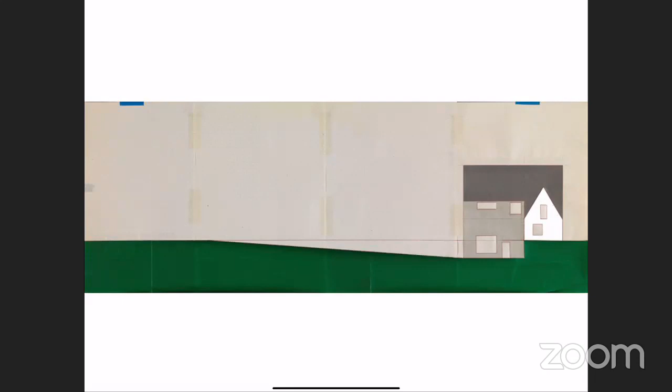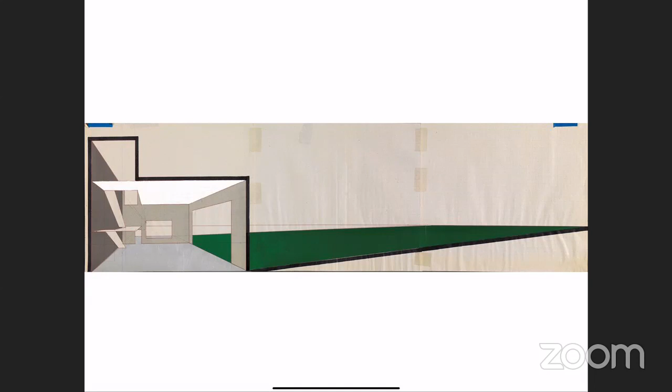When we were there, we felt that it was not too small as such, but maybe the space felt very small, since the ceiling floor height was not sufficient enough. And those are four drawings that go along with it. The key drawing is this one, in which we explained to him that our opinion was that we should take away the floor between basement and first floor and ground floor, and then subsequently also the floor between first level and attic level.

But by doing that, one would gain space. Space not in square meters, but space and feeling. And as we said, the garden was tall enough, we could dig out a house and that's it.

And when we pinned up these drawings on the wall of the living room, I still remember, we were explaining, and the smile from the client changed to a big laughter. And like, half an hour later, we were back out of the room at the front door. We lost the job as young architects coming from school.

You can imagine double sizing this house - that's quite a lot of money for young architects. It would have been quite a job. But on the other hand, we lost it immediately, one of our first jobs. But I think we won so much more in our mind. We're happy to lose it this way.

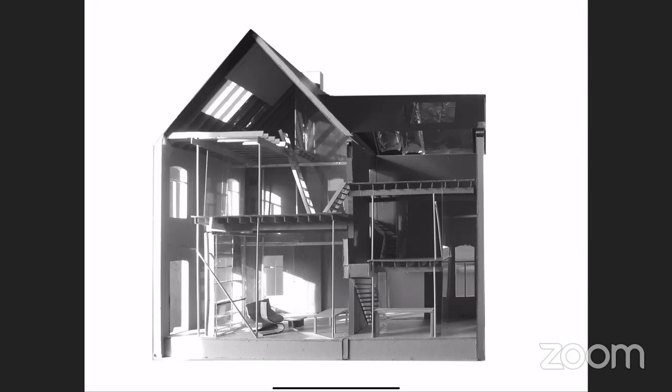Presenting this project happened with drawings, of course, but also with a model like this, which is kind of like a puppet house size model that gives an impression of how the house would not only look, but also how you could build it. Another image gives this impression again.

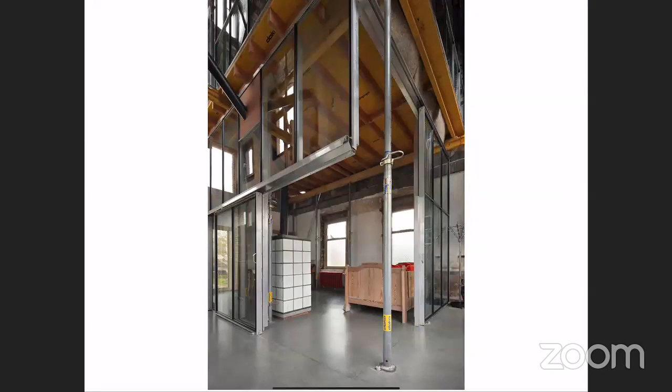And at the end, what did we do? We built inside the house a glazed house. And this glazed house, depending on mood or season, can change its attitude. But at the end, one is always still in the old house as it has been found.

Now I could talk with you about many nowadays topics about sustainable space and climatized zones and everything, which is very interesting and necessary to think about, but on the other hand risks becoming a tendency and fashion. What is more important for us is the way we can reuse the things we found, not only through restoration or renovation, but also in a way that, for example, this house, being a totally demountable house, can become another house or another project once again.

So for us, looking at this project, or working on it at that time, it was a discovery, or not only a discovery, a challenge towards budget, towards context, towards the clients, and how they could live in a different way than they lived before.

But maybe at the end, when you look at this image, you see in the middle still a wood stove, as they wanted to have the pleasure of the wood stove. To me, much more interesting is to talk about the position of the stove in the middle, on one hand, but on the other hand, just its position towards the old fireplace in the wall.

And also, for example, you see a concrete beam in the old walls, which is needed when you take away the old floors. Exactly, the beam is at the height of the old floors. One has to tie it all together with a kind of concrete beam around, done like that.

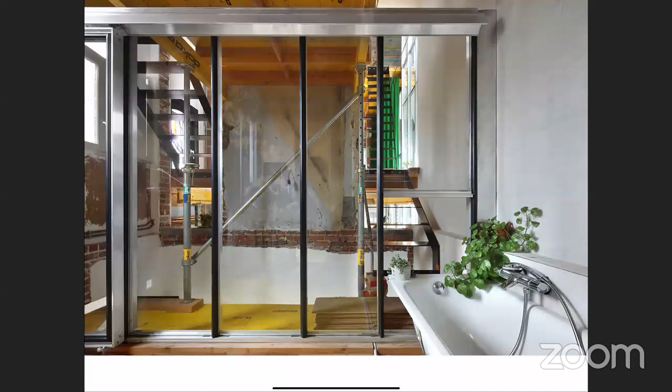And at the end, they found themselves a small house that is on their size, their capacity, in their hands. And that's maybe where it could be about, when we think about the house today: how to live things, not how to make a kitchen, but how to cook, not how to make a bathroom, but how to bathe, and so on. To end up with this small project is a painting, a drawing regarding this facade.

This facade is the only facade of the house that needed to be insulated. You've seen that it's a glazed house within the house, which helped us avoid renovating all facades or updating them with insulation, though one part was leaning to the outside wall.

It's this wall, and the beauty of the wall was that it was made of old bricks on which rain and time changed the aspect of the wall. The decay came on one hand, but a kind of beauty also. And if you have to insulate it, it disappears.

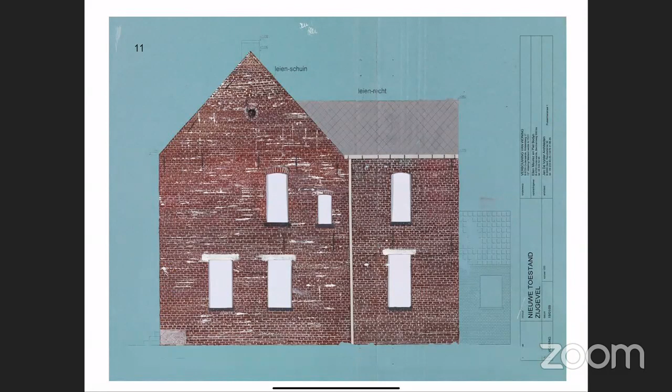And with the clients, Peter and Ellen, we were concerned about that. This image, this drawing, depicts the idea of the beauty of the wall. And then we had to cover it. We covered it with the typical cement tiles one always finds on old waiting walls.

On those cement tiles, we did exercises on the idea of how we could represent the beauty of that old brick wall behind. Here you see a set of exemplary exercises we made on how we could treat those tiles. Finally, it ended up being a simple exercise of just drawing lines, on which Peter and Ellen, for 2 or 3 weekends, were constantly drawing those lines on the tiles before they were hung up on the wall.

And it's quite an exercise because tolerances were quite a topic. Why do you do that? Well, maybe just the ambition of wanting to hide a certain beauty at a certain point.

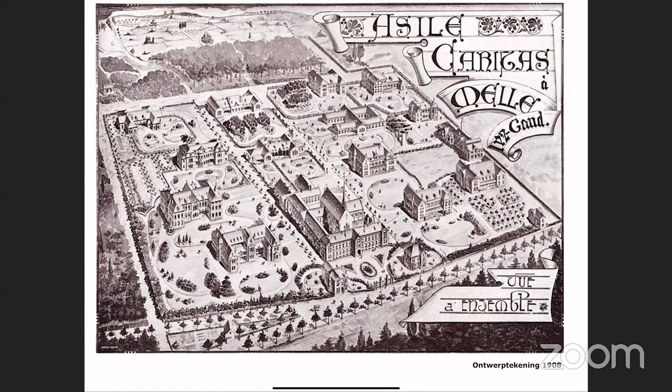But this was a new model, a park in which different pavilions had been raised for the different forms of diseases. This is an aerial view - after a certain time, after the post-war period, luckily around 1910 there was a new vision on psychiatry, or at least more attention to it, and clinics were built for it.

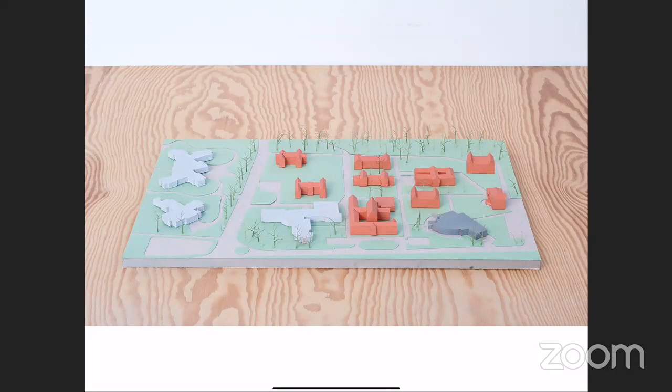But then after post-war, in the 50s, they started to really change the plot, and they began to demolish quite a lot of the villas here on the left side. On the left below side, all 3 villas have been demolished. This is a model from the competition in which we brought it all together, showing how many villas had already been demolished at that time.

For example, also this one here, there's one missing, and I don't know if I can get that away. The point was, to us, the competition brief was purely about the pavilion in the middle that I showed earlier. But when we were there, we understood that probably more was needed. And we always say that what we entered into the competition were 3 answers, though there was only 1 question - so we answered 2 other questions that had not been raised.

The first question we added to the competition brief was about the idea of a certain unity of architecture all over the place. We cataloged and walked around the site, and what we discovered was that although there were differences across the different periods of realizing the project, with a certain view, one could say that maybe a certain unity could be refound.

That unity for us was the idea of reintroducing loggias. Some of the old buildings already had loggias, but also the new, or demolished or changed buildings of that time, we could reinterpret and introduce loggias into. By that, those loggias could become a new frame of unity all over the place.

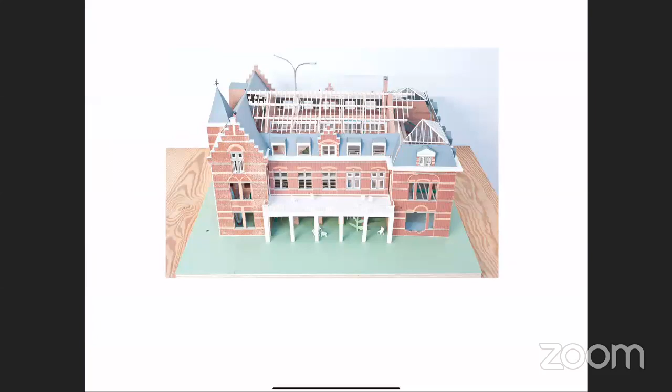The question was about this old pavilion building of Caritas, the object of the competition, an abandoned building where they had already started to demolish parts of it until they found asbestos and had to stop. The young director who arrived at that time was faced with this demolishing and said, yes, regarding nowadays regulations, we can't move on with that anymore.

We were facing a loss of heritage on one hand, but on the other hand, you could say that architecture and space is really a topic connected to mental diseases, many mental diseases. The question wasn't only how we can still work with the old building, but also how it could eventually become another kind of space in which all kinds of activities could happen, activities not normally expected within the regular frame of functions, program, and therapy.

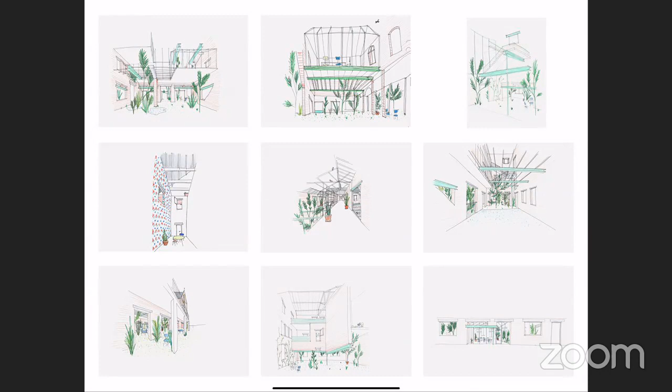That's why we made a puppet house, and a set of drawings where we said, we're going to present a project now, but possibly through time, not only because the building will be confronted with certain decay, but throughout time your idea of use might also change. This is the instrument, the model and the drawings, that we will keep using with you in the further project as it moves on years after the first delivery, as it indeed happens today.

Here you see what happened: we took away the floor, so rain comes inside and can drain away. We took away the plasterboard so the building can breathe when it gets wet. Then we added a few glazed structures, so that without climatizing them, still in the in-between seasons, one can use the building in one way or another.

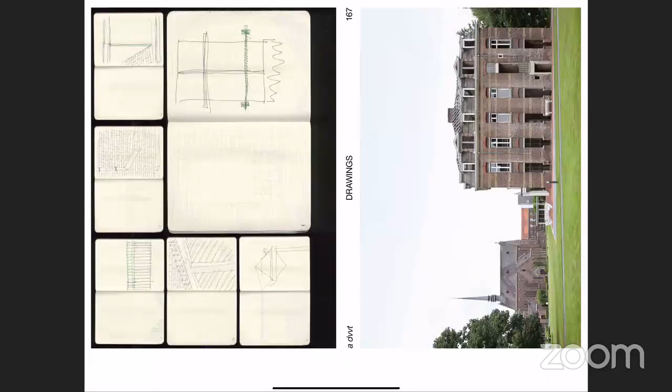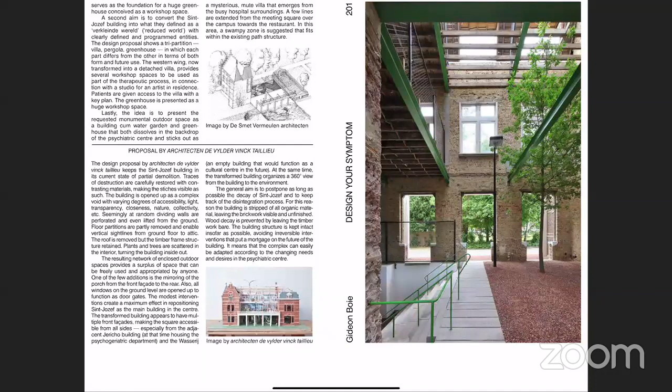We also made a booklet with the same name. In that booklet, we not only collected on the right side the 97 images by Filip Dujardin of the project, but on the left side we invited many people - the director, therapists, people who live there, students - to share thoughts, writings, and reflections on the project, giving their ideas and comments.

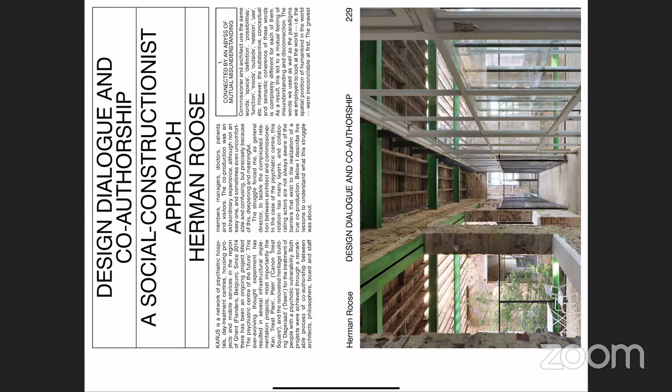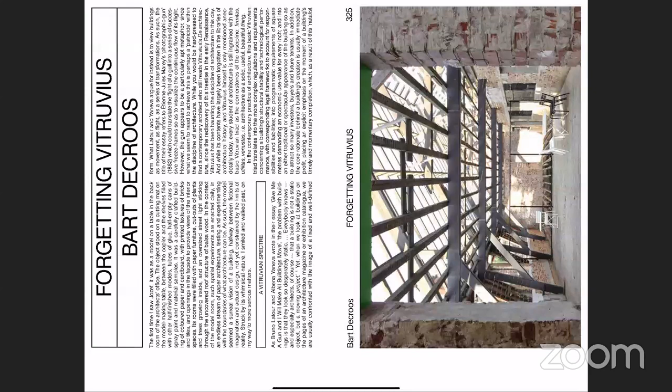So the booklet is a critical booklet, not one just celebrating architecture. It's a booklet reflecting on what happened here - I wouldn't say the pros and cons, but the eventual next things to be expected. So for us, this is when our architectural practice became capable of entering the world of research. Maybe I'm not always happy with the word research, but in the end we entered a kind of reflection.

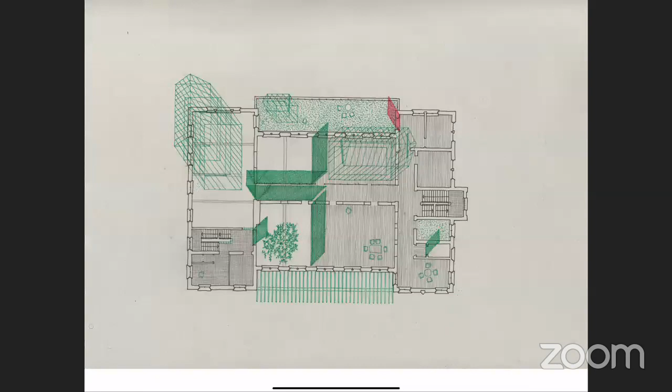This brings us to a phrase which we would have loved to have written ourselves, but happily it has been written by Francis Alÿs, Belgian artist living in Mexico City, raised as architect at the architectural school of Tournai. And what he writes here really, I believe, is something which frames quite what we are looking for. Again, we have to stay decent towards the person of Francis Alÿs and the work he makes.

It says: sometimes doing something poetic can become political. Sometimes doing something political can become poetic. It's unbelievable how nicely this sentence brings two words together, poetic and political, two words one could say are hardly combinable in the same sentence. But yes, I believe that what we are looking for deals in some way or other with those two sentences.

And I bring it to a project we are in full building site phase with today. It's a competition we won a couple of years ago in the city of Charleroi. This is an exposition building in the middle of the city. Well, we are now at the height of the Belfort Tower of the townhouse, and we're looking over the old industrial landscape of Charleroi from the terrace.

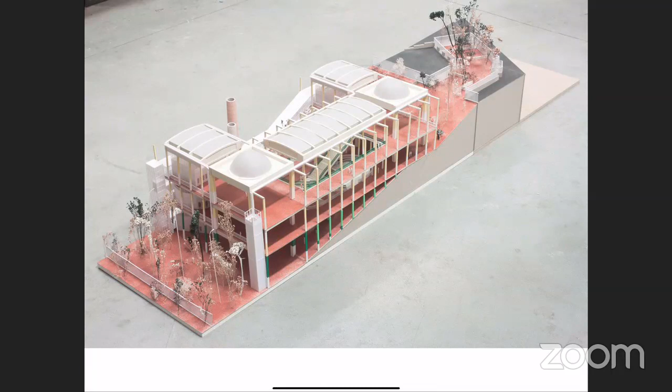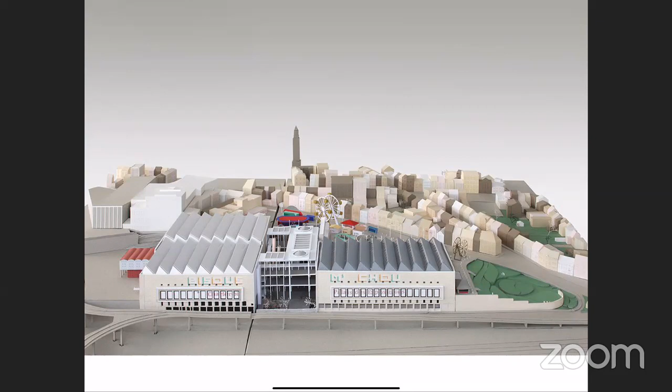So the proposal to us was not only a proposal of the idea of the architectural space and the idea of reviving cities with parks and such. At the end, that will be the project. But the project was also about, let's say, the political strategy of redistributing money and means of things all over the building, and by that trying to obtain a totally other kind of architecture, not only, but another view on how to manage resources. And today we are in full building sites.

These are still some images of the model, in which you can see, for example, that today we only have the two above floors, but there's a third floor lower, which has an even higher ceiling. We will extend with some staircases going down, and an escalator and elevator, so that the three levels really come free.

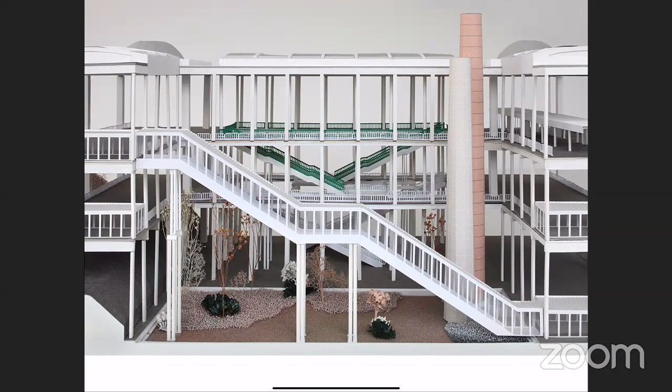This is an image of the below level, as just mentioned. And this is a Filip Dujardin image, but not the Filip Dujardin collage. He got very nervous walking around there, because he sees in real what he sees in his dreams. So there are beautiful images, but today we are still in the stage of opening the building.

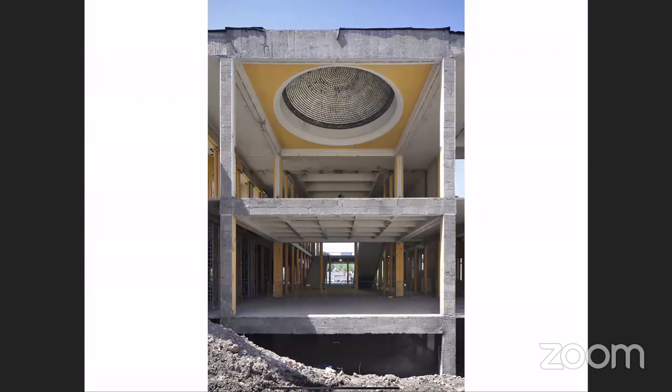These are images from two or three weeks ago, in which you can see that the facades have been taken away, and you can feel the first qualities of the transparency that will connect upper and lower city. Here you still see the middle patio with the facades around. They will disappear soon, but these are some images of what is going on right there.

It's regarding this project, and in between this project and the Caritas project, that we were so, let's say, ambitious to bring in the words of Francis Alÿs. Some images, I wish, to take you all over there to understand the scale.

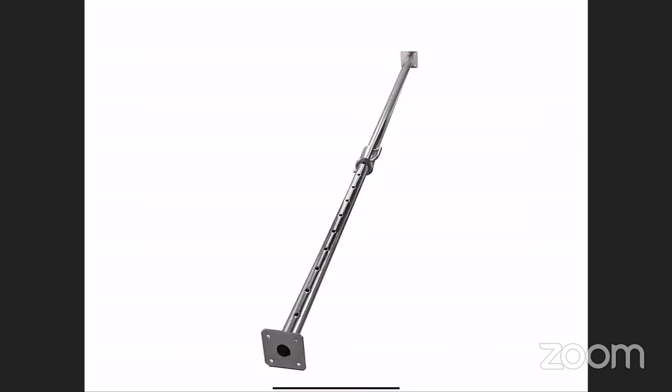So again, we make objects—for example, with silver duct tape, we make precious objects like this totally taped, simple building pole that no one really pays attention to. By doing this, it becomes something you want in your living room, and with a couple of them, we can change the spatial understanding of how you use your living room. Depending on the money you spend, you can have it with a gold look, a silver leaf look, or just a silver tape look.

And it brings us to the last project we present. The projects we showed you, often we say it's like a walk through the forest—when you have good shoes on, still some little stones you can find in your shoes, and they start to hurt a little bit, but you don't want to open your shoes immediately. They guide you along the walk, and at the end you open them, and that's the story of life somehow.

This is also a project regarding a pavilion we were asked to build, and this is a kind of one-to-one mock-up of what we were looking for. A pavilion is, of course, one of the most sublime themes or typologies in architecture—architects like to be able to do one in their lifetime.

This came at a moment when we had many questions with Caritas and with Charleroi. A pavilion normally represents the newest society, the newest technique, a kind of optimism, and we weren't sure whether that would be a good theme or whether that was still in our interest. So we started a small experiment.

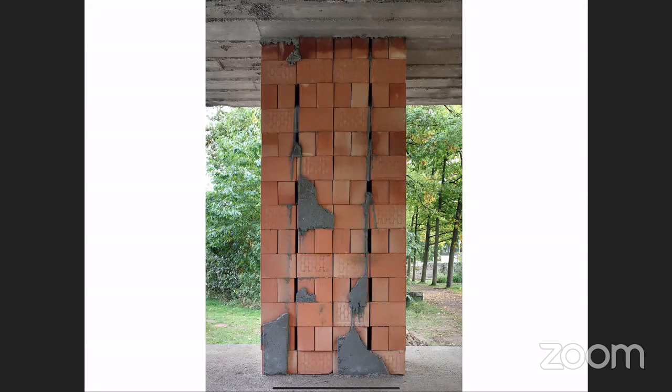And you can guess this pavilion had only lovers and haters and no people in between. Some people loved that insects and small animals could find their place in it, while those who wanted to visit the park on a Sunday afternoon found it something that needed to be demolished as fast as possible. But for us, it had many other meanings.

What are we looking at now? Is it beauty, or is it the contrary of beauty? Is it building, or is it not building anymore at all? To us, finally, this pavilion became maybe a very personal reflection on what a pavilion could be, but also a reflection on where we were at that time with the way we looked at or worked in architecture so far.

Things happened as they happened, and yes, the pavilion was demolished because, in fact, the commissioner—the Agency of Forests and Waters in Flanders—gave themselves a building permit on this, but there was a mistake in the permit. So the commissioner, having given themselves the permit, needed to correct the fault to set a good example as a government, and they demolished it after this.

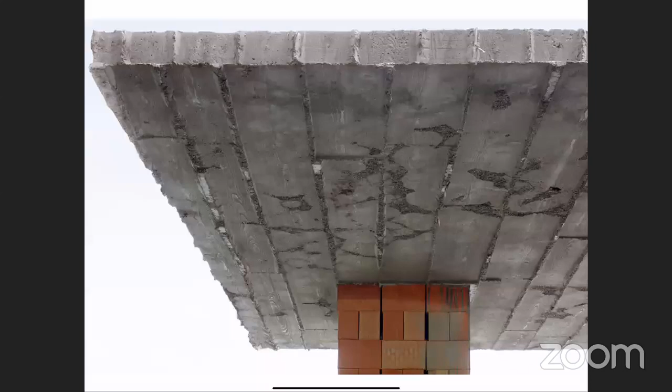Some people, as I said, were loving it, some were hating it. On one hand, Lieve de Kouter mentioned that maybe it had something to do with Mies van der Rohe, but on the other hand, he expressed to us that he hated it at all.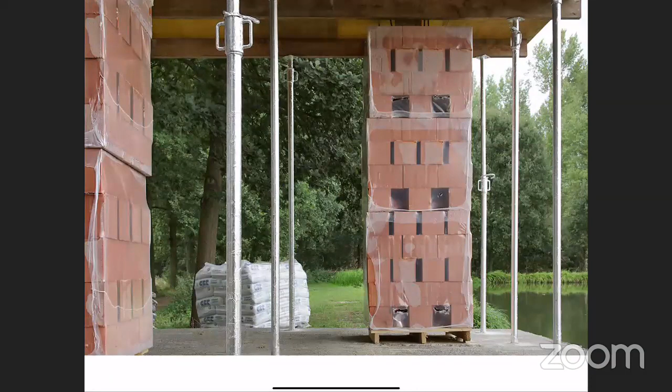So, this is it. I have to swipe this out, isn't it? Maybe, can I add one more? I had forgotten that it was in a lecture. No, well, I do.

So, you're muted, Christoph. You're muted, Christoph. Yeah, now I'm not. No, I mean, this is of course my self-restraint, you know. I'm very good at self-restraint these days. You don't know me like that, do you? No, that does.